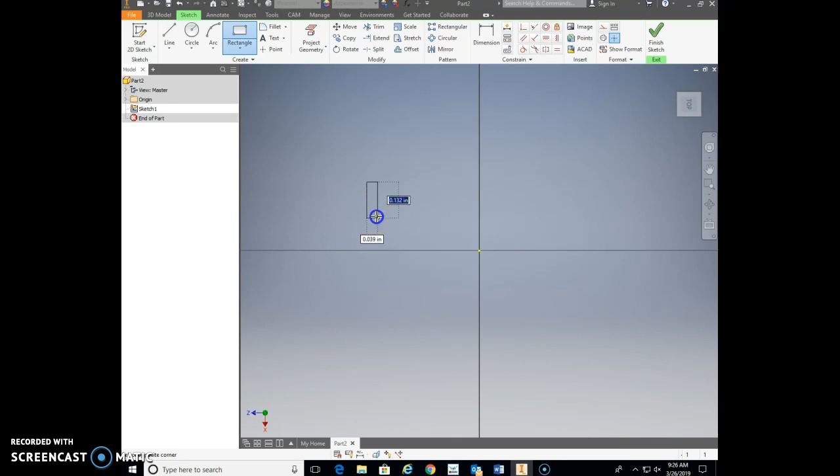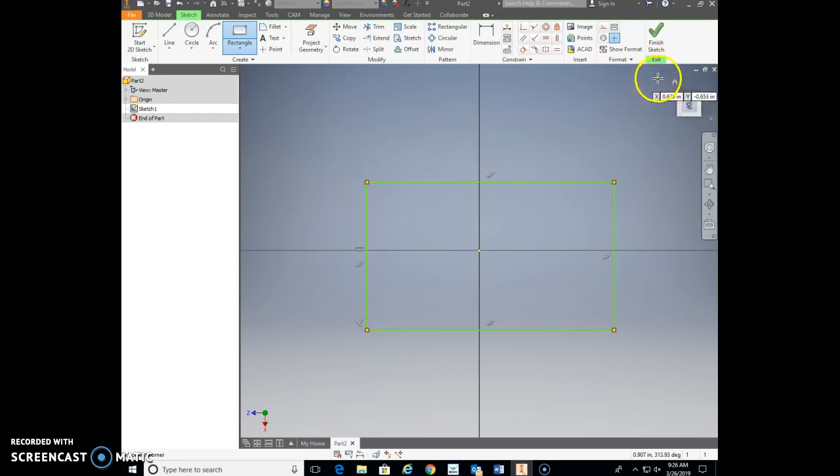The other thing I'm not going to do is take time on all these drawings to fully constrain them. I know that's horrible, but I think it'll make these drawings go a little faster. Obviously, you'd fully constrain that horizontally and vertically, dimension it, and finish that sketch. I'd extrude that base, and something like that base looks similar to the one in the book.

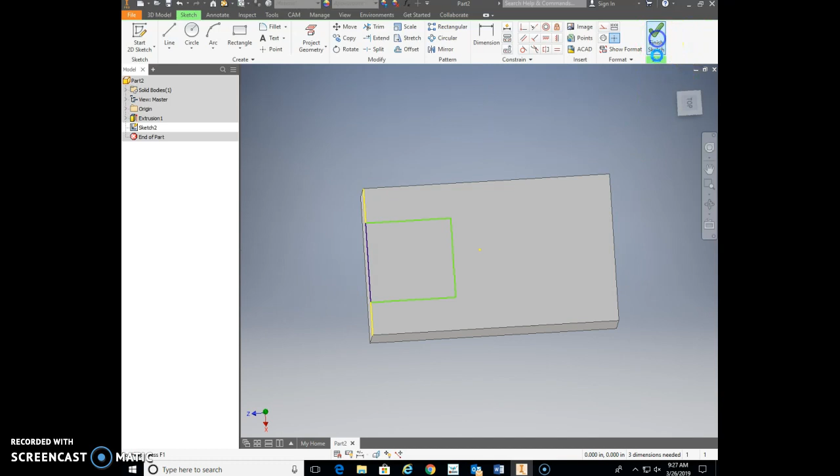Next, I do my next sketch on this top plane. I think that's what I'd do. I'd make a little rectangular shaped block attached there and around to there. Notice how that back line is blue. I'd obviously get that centered by dimensioning it, but I'm just going to eyeball mine here. Something kind of like that, and I'll finish that sketch. So there's my block. I'm going to extrude it with the scale I'm using now, something about like that.

All right, so I got that—that's the first part of the letter F. Next, I'm going to put this triangular shaped piece on there. I'll start a sketch on this top plane and draw a line using the line command.

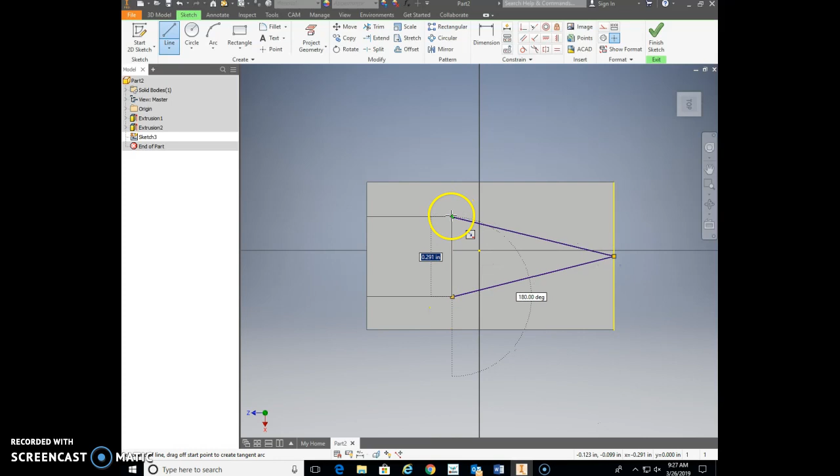I'm going to draw from that corner, it gives me a green dot, to the midpoint up there gives me a green dot, from there back to there gives me a green. Whoa, did not give me a green dot. Let me try that again. My goal here is to fully constrain it. There we go, and there to there. Now notice that's all blue already—that's fully constrained. So I'm going to finish my sketch.

I'm going to extrude this, and here, instead of putting a distance on this, I'm going to mix it up a little bit. Where it says distance, look at some of my other options—I'm going to go 'to,' and go to this surface right here. That way, no matter if I change this distance, this will change with it. I'll go OK there. So right there, that's looking pretty good.

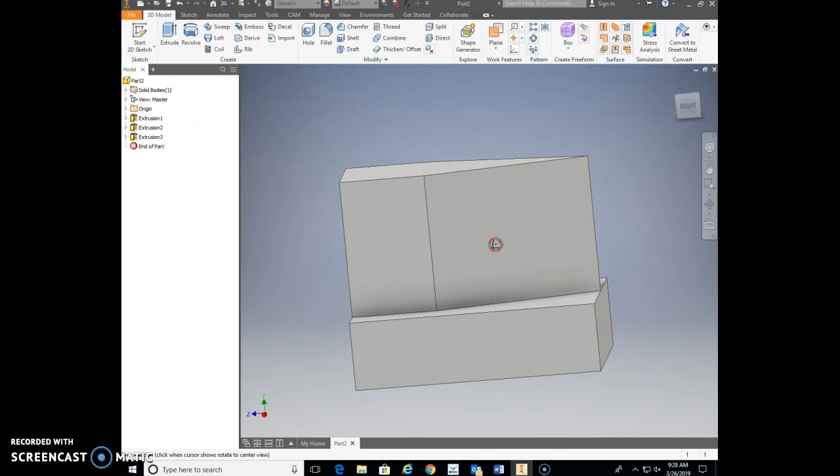But however, I do not have this part angled down here, so I'm going to start another sketch. This sketch, when you start it, is kind of important. You don't want to start it here on this plane, because this plane angles, so then your sketch plane would angle. You want to start it here on this flat portion.

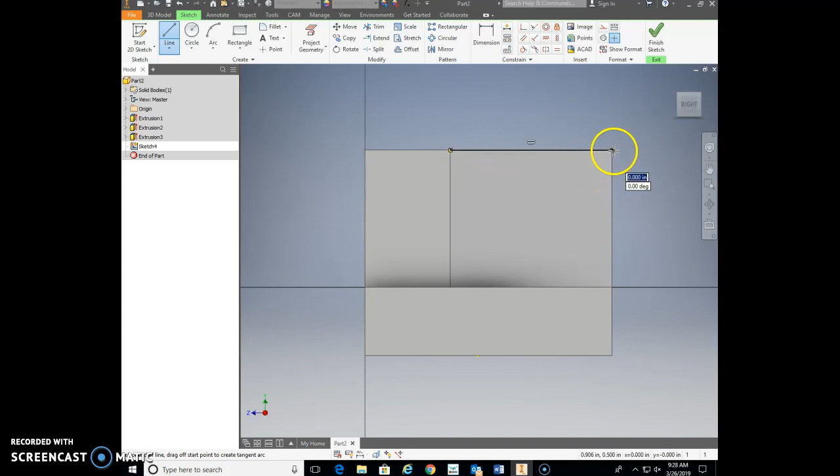So you start your sketch there. Once again, I'm going to draw a triangle shape. I'll start it right there on that green dot, straight over, lock into that green dot. Here, I'm going to draw it down a ways to there, and something like that. Again, you would dimension that to constrain it and turn it all blue, but I'm going to go ahead and finish the sketch.

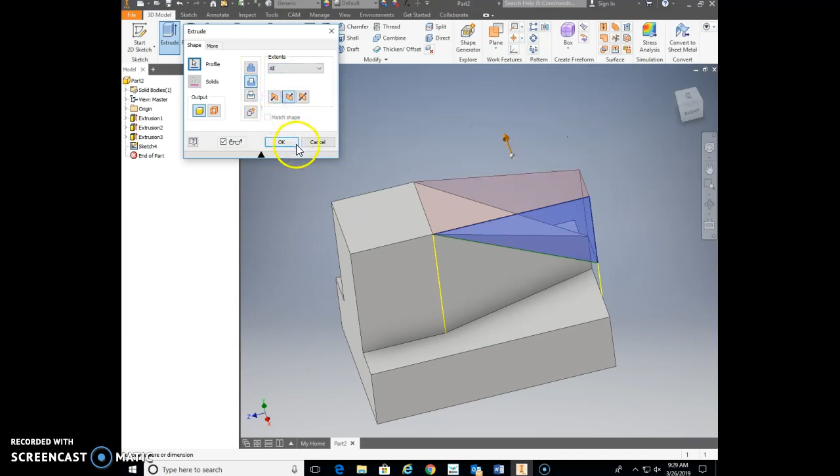I'm going to extrude that shape, making a cut. Once again, instead of setting a distance, I'm going to cut it to all. I'll go all there, go OK, and there is that block finished up beautifully for letter F.

Obviously, it's not the exact same dimensions as the one in the book or same proportions, but it's close, and I would have taken more time to do that, but I wanted to hurry through this. All right, there's number one.

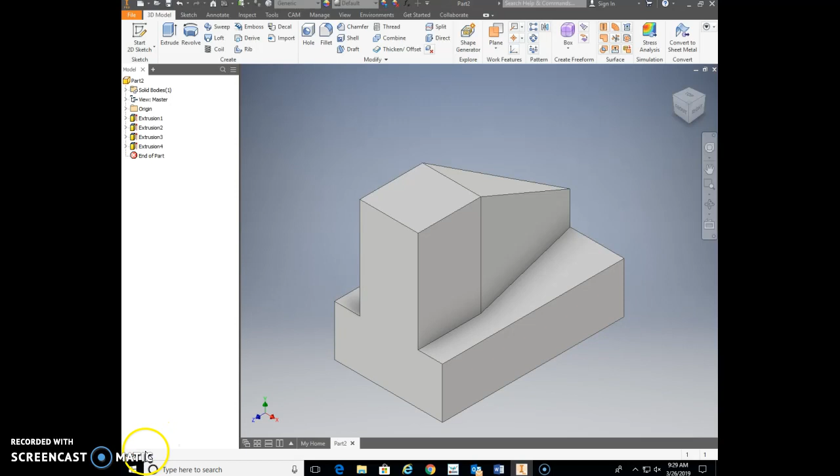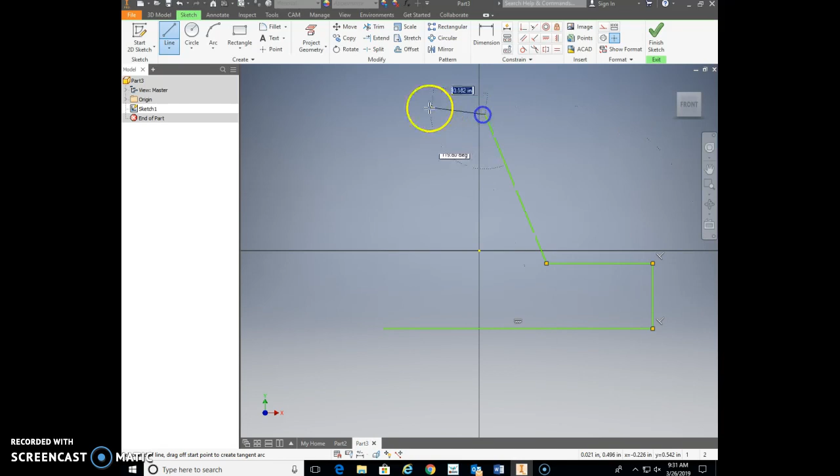Now I'm going to go on and do bottom letter H, so I'm going to start my sketch on this front plane. In that front plane, I'm going to use my line command, and around my origin, I'm going to draw the shape that you see in that front view, so something that looks similar to that.

Once again, I'm not going to take time to fully constrain this. I'm going to go finish my sketch. I'm going to extrude, let's go something about like that, and that looks pretty good.

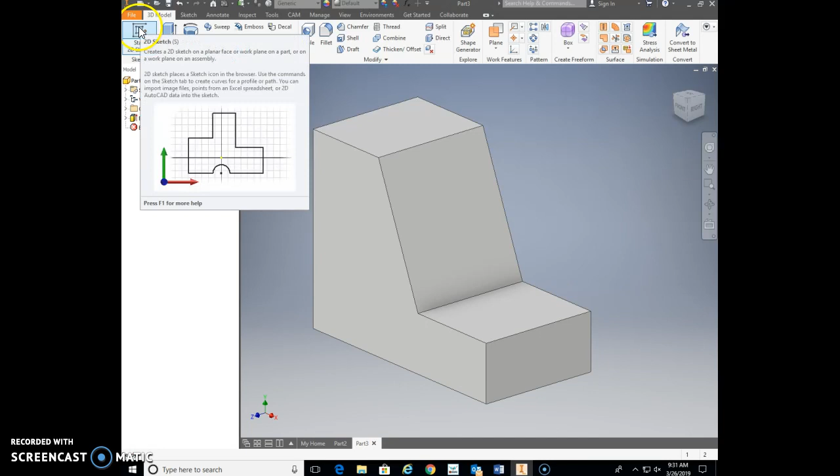So there's that shape. From there, I'm going to go ahead and start another sketch. This time I'm going to start it on this end plane here, or I should say end on this right side plane.

Here we're just going to draw a line. Notice how it gives me a green dot there. I'm going to come up to the midpoint of this line, it gives me a green dot there. I'm going to come from there down to there. Whoops, did not give me a green dot, so I want to redraw that line, or I can drag this line like this.

Notice here, it's not giving me the green dot. It's being stubborn, I don't know why. Sometimes Inventor will do that, gives me the green dot here, it doesn't here.

What you can do is something called project geometry, and this is a good one to see. So project geometry, project the geometry of this surface, and it highlighted it there with blue.

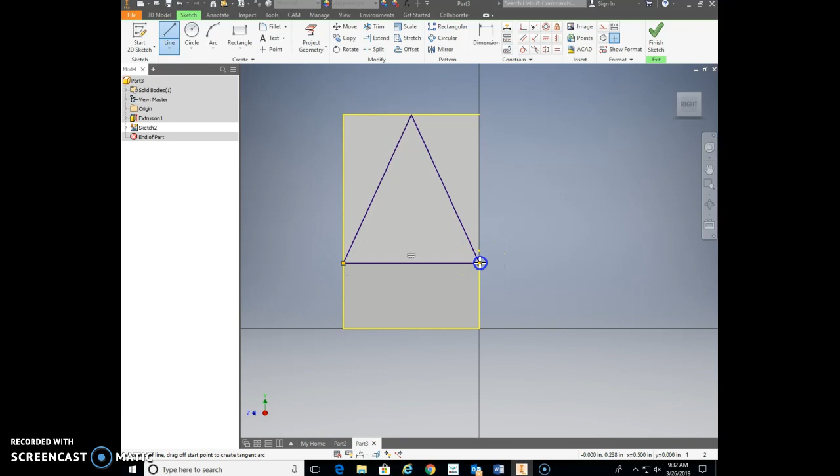Now you can grab that. Notice, you can lock into that dot. Oh, it's good. Now we're going to draw this one across from there to there. That is all full blue. Now we're just going to finish our sketch.

I'm going to go ahead and go extrude. Select that shape to extrude. We're going to make it go the other direction. Now here's another instance of, instead of putting a distance in there so where it overlaps, just come up here.

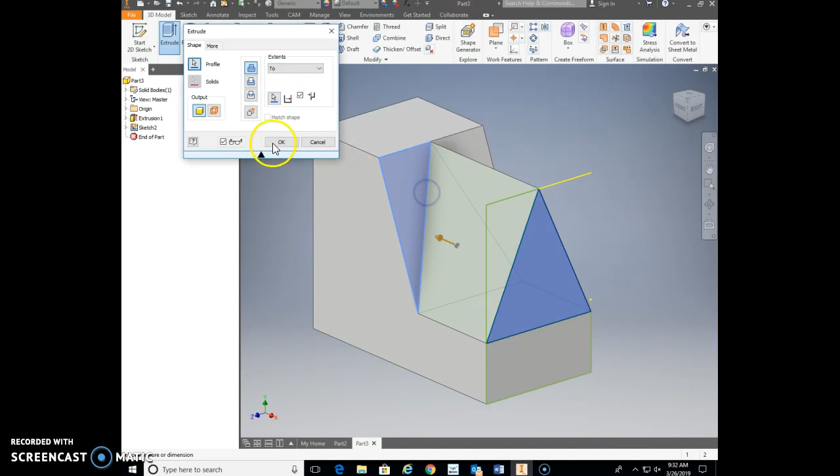What one do you think you might pick? The same one we did the last time, which is To. We're going to go to that surface right there and go OK. There, that one's finished up already.

Again, we didn't do this on the last one, but pick some material. Gold, beautiful. Save that as page 81, bottom H, and you'll be great.

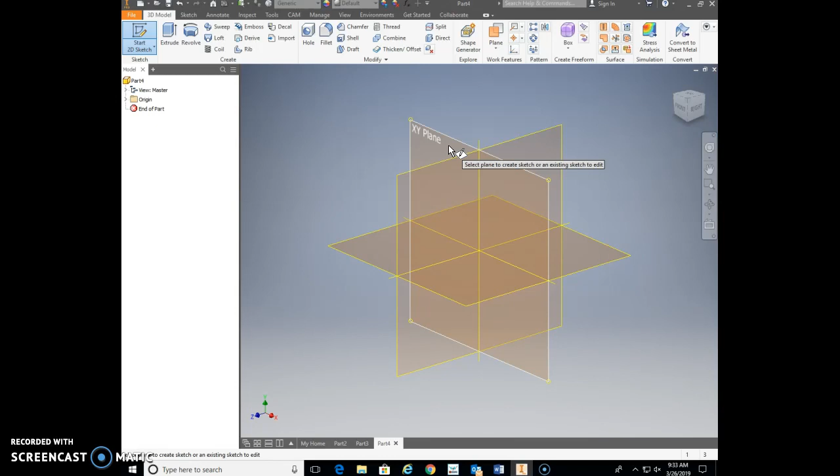All right, J. This is J. Eeny, meeny, miny, mo, how I'd start J. If I started on the front plane, I'd draw that little kind of upside down U-shaped block. Or if I started from the right side plane, I'd draw that angled piece. Like I say, eeny, meeny, miny, mo. I'm going to start it from the right side plane, I guess, there.

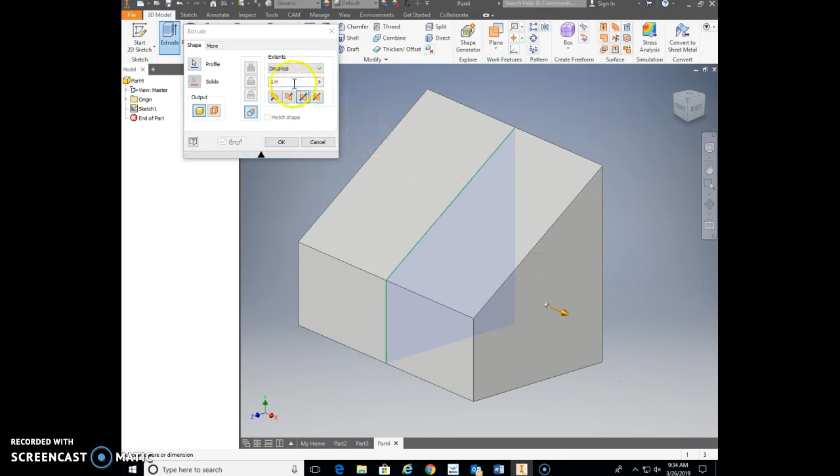From there, I'm going to draw this shape. Again, I'm not going to take time to constrain that. I'm going to go finish your sketch. Going to extrude both ways, and to make it proportional, I should make it a little bit wider this way. I think that's pretty close to being proportional.

Then I'm going to start a sketch here on this front plane. Easy enough there on the front plane, I'm just going to draw a rectangle. Going to draw my rectangle there. You'd get that all centered up and fully constrained, I'll let you figure out how to do that. I'm going to go ahead and finish my sketch.

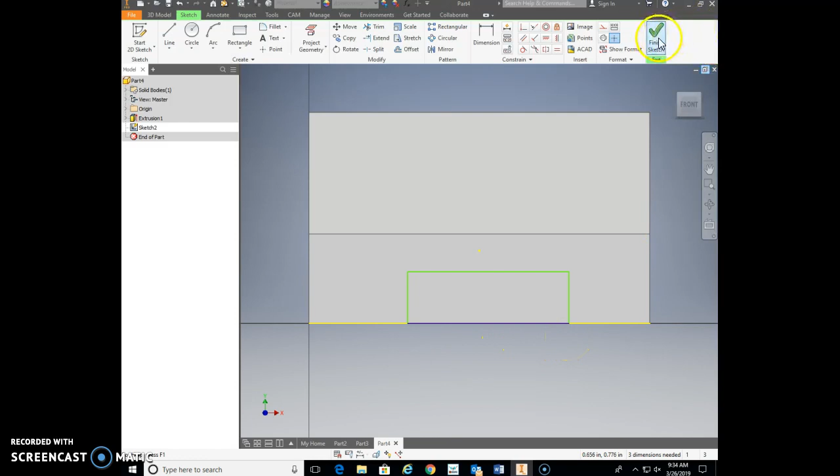Maybe I'll make it a little bit better before I do that. That's a little bit closer. Finish my sketch, extrude. Now this one I'm going to change to cut.

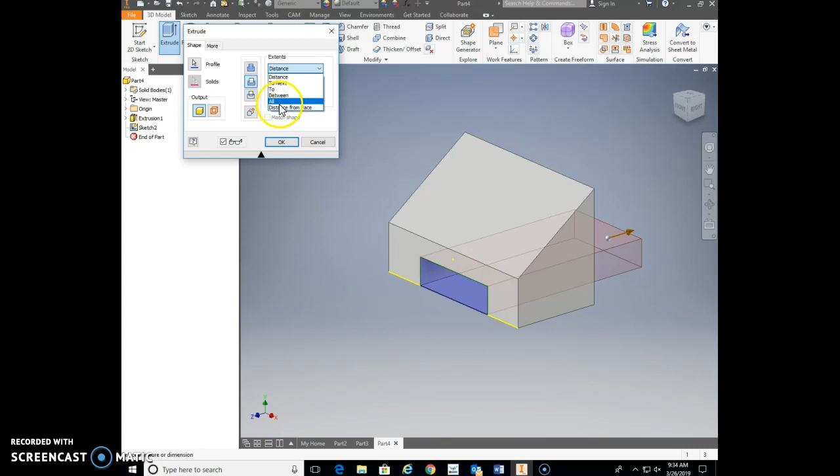Again, very similar to what we've been doing on these last couple. Instead of cutting it a specific distance, I'm going to cut it. I'm going to cut all of it. We could go To, but in this instance, it'd just be better to go all. So I'm going to cut all of it, no matter what. I want everything cut. I'm going to go all and go OK.

Okay, so now on this one.

This one we need to make a sketch out here in the middle of this block on a plane, and I'll open up my origin on that plane. But there's a little bit of a weird thing here, so this is going to be kind of an advanced step. If you figure this one out on your own, kudos to you.

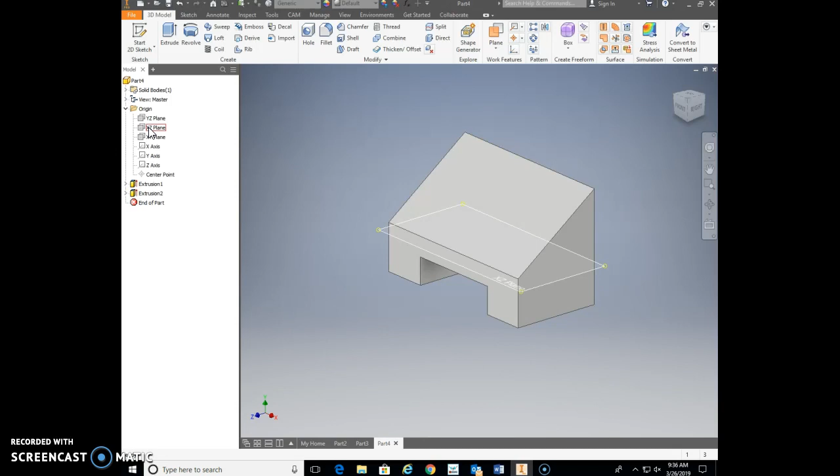If you didn't, here's how you do this. Notice this plane only shows up when I hover over it. What you need to do is turn that plane on so you can see it. If I right click on that plane, there's an option called visibility. Put a check mark by the visibility, and notice that makes that plane visible now.

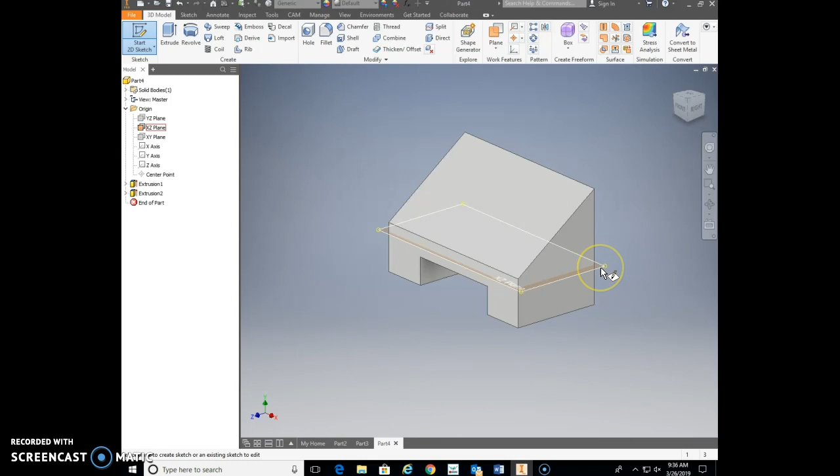Now what I need to do is make this plane not right here, but sketch on a plane that goes through this corner. So I'm going to go Start Sketch and come up here. I'm going to hover over top of this plane where it's highlighted, click and hold, and now notice I can drag this plane up and down. I'm going to drag this plane up just a little bit, and then put that plane in exactly right there to that corner.

Now, for me, that's going to be difficult because I didn't make mine as any normal increment. Normally it'd be up 1/8 of an inch or up 1/4 of an inch, some nice even number. Mine is not going to be a nice even number, so I'm just going to have to guess. I'm going to go about 0.1. That got me pretty darn close to that corner, and that's going to be good enough.

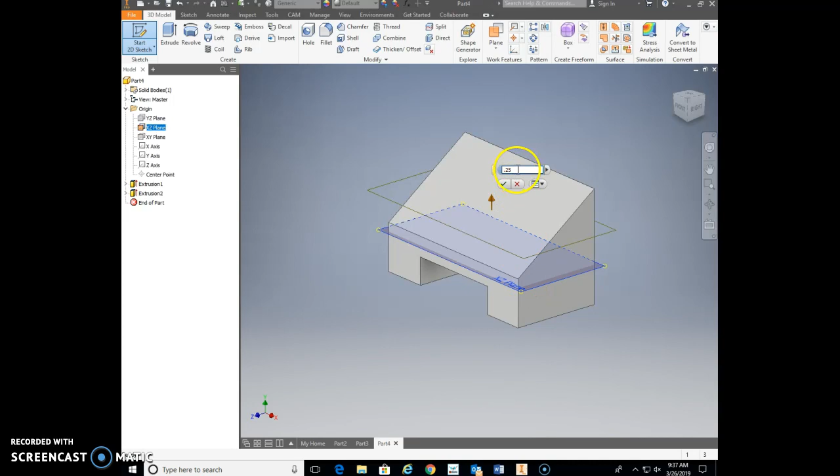Notice it moves as you type this in. Yours should be, if you keep everything on a 1/4 inch increment, 1/4 inch or 1/8 of an inch or 3/8 of an inch or 1/2 of an inch or something like that. I just accidentally did that there, and got it way up high.

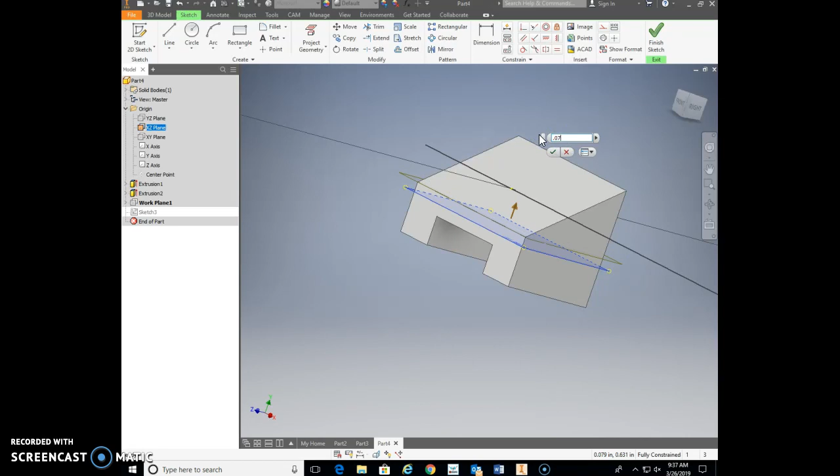What you can do there is edit this work plane. So I'm going to double click on it, and there's where my 1/4 inch was. I'm going to go back down to 0.1. And, oh wow, looking at it, 0.1 is not really where I want that to be. I'm going to go a little bit lower, 0.07. Ooh, 0.07 is beautiful. All right, so that worked for me.

I'm going to go ahead and put that back in normal view. All right, so now the rest of this is easy. We're going to hit F7 so I can slice my graphics, and I'm going to draw in this little triangle shape here that I'm going to cut out of this. So I'm going to draw a line. I want that line going to the midpoint there, locking in, up to this front surface of it.

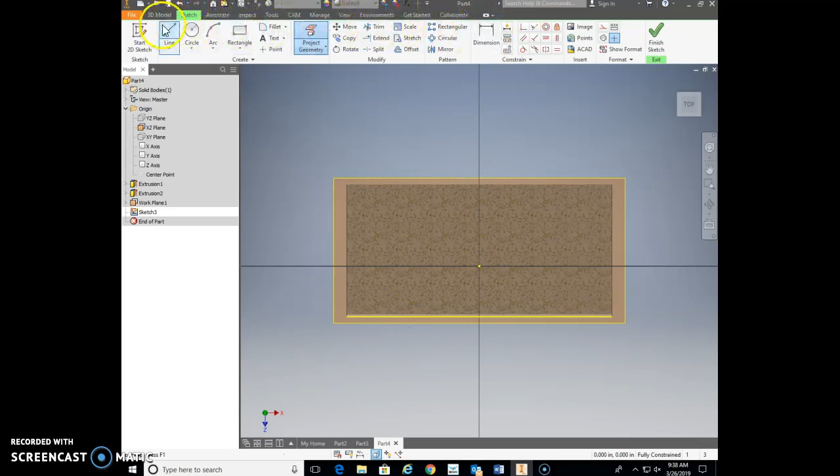Now in this instance, again, I'm going to have to project my geometry, so I'm going to project geometry of that front line. I'm going to try that again, going from that midpoint to that front line right there, and a line across there. Again, that line's all blue. That's nice. This will be locked into place, and here we can now dimension this in.

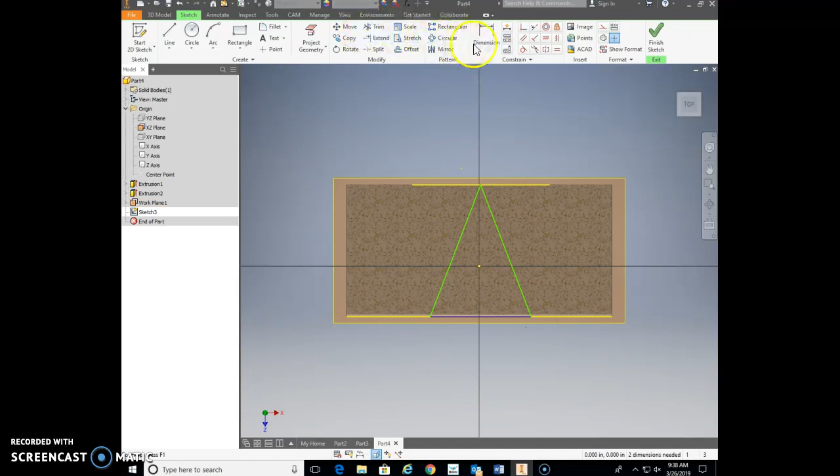And this is one I didn't show you - I probably should show you this dimension. We can do angular dimensions just by clicking on that line and then clicking on this one. And I can set that - looks like maybe a 45-degree angle is going to be appropriate. So that's got that nice there. The only thing is now it's 45 degrees, but it's not centered up.

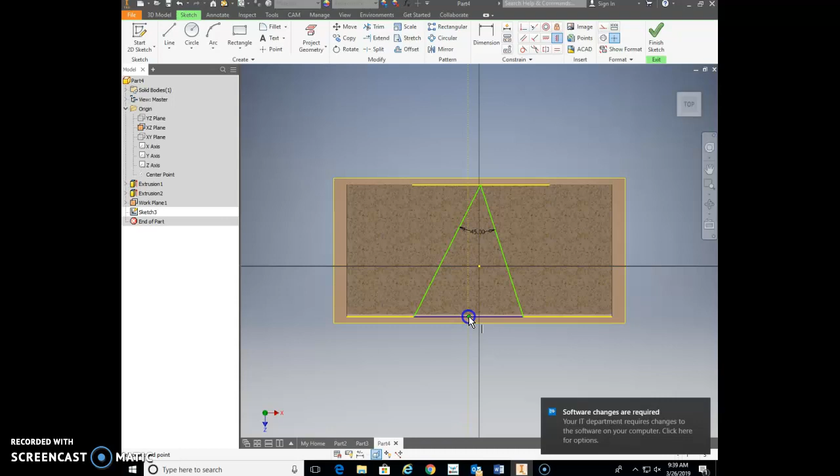What you'd have to do next is center up this bottom line. So do a horizontal or vertical constraint on that bottom line. Looks like it's going to be a vertical constraint there to there. And that one's got that fully constrained now.

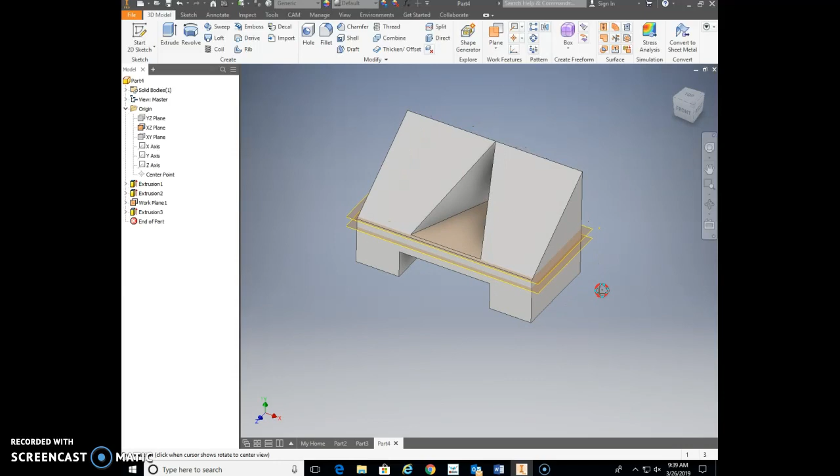Finish your sketch. We're going to extrude that, change it to cut, not a distance. Going to change the direction, back it up, and we're going to cut all. And there you go - is that thing beautiful? Looking just like that. Now here's the next little tiny tidbit on this: you change this to some material again.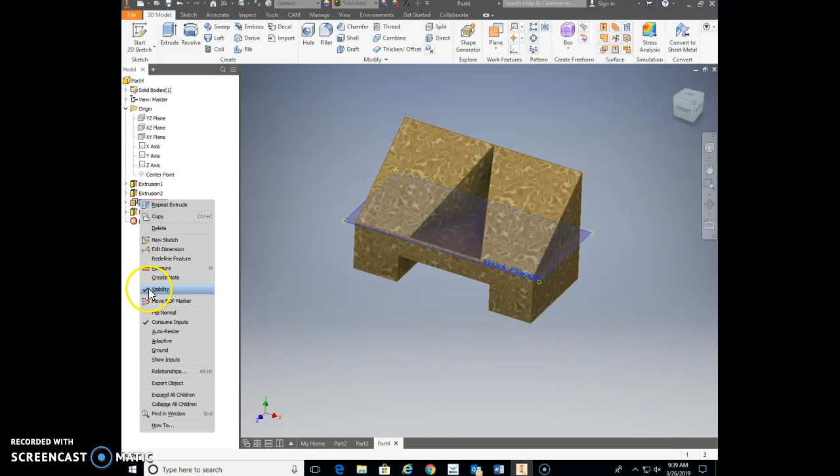Foil gold, sure. But I see these planes out here. I want to turn the visibility back off on those planes. So to do that, I'm going to come up here, right click, uncheck the visibility there, come here, this work plane's showing up too, uncheck that visibility, and right there is that looking beautiful.

So that's that one. Alright, next I'm going to do letter K. On letter K, I'd start that on the right side view. On the right side view, I would draw this shape. And let me see, why am I not blocking it? There we go, I'm going to draw this shape here, something kind of like this.

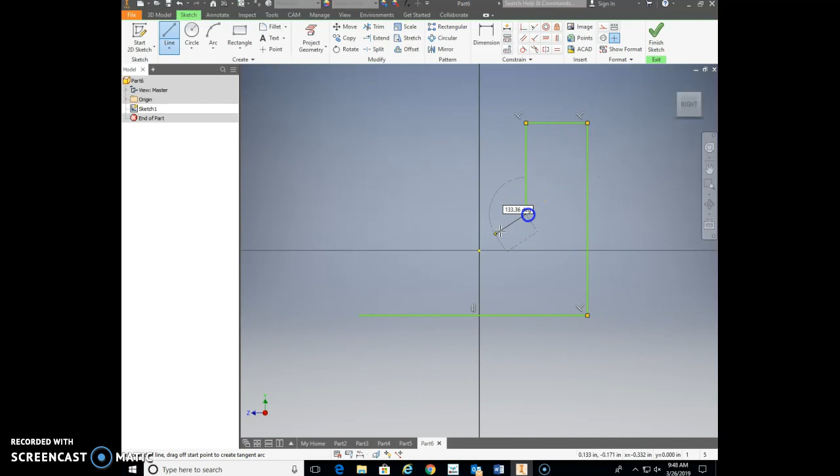And just draw that shape. Obviously, can fully constrain that, but I'm going to finish my sketch. Extrude both ways, and maybe a little bit more, something like that. So there's that. Then I do another sketch here.

I do the sketch on this plane here. I draw a little triangle shape in here. Let's see if it doesn't go quite all the way down here to the bottom. To there. A line across the top.

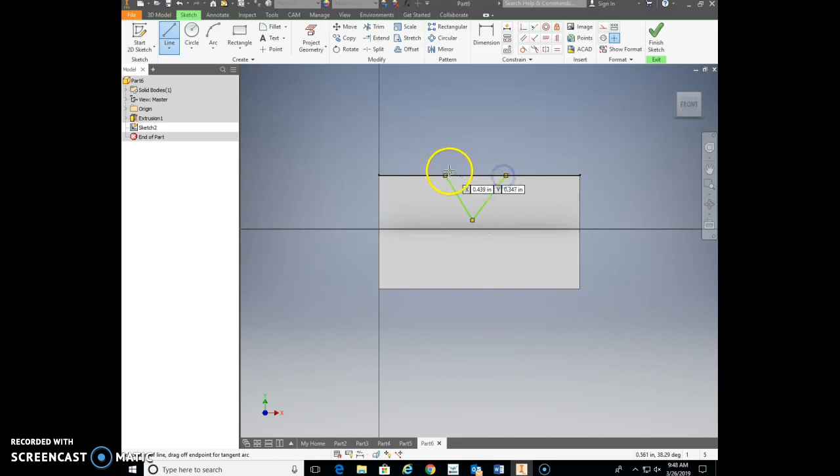Again, I would center that up. I would probably angular constrain that, but I would finish that sketch. Extrude. Cut it and cut all. Cutting all is a good option there because you always want that cutting all the way through.

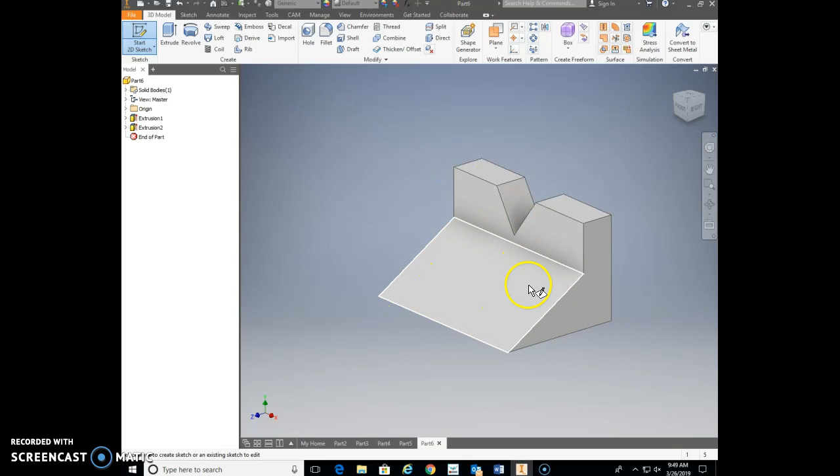Next, I start another sketch. Now here it's a little bit different. You wouldn't want to start your sketch on this plane. It actually started up here on this plane, which is a little bit weird.

You could also flip it up and do it on this bottom plane. You know what? I actually think I'm going to do it on this bottom plane there. So there, we're going to go ahead and draw our triangle shape here. Now there, notice one thing I did.

I didn't even do it on purpose. I locked it into that line. So now that's locked there. I really didn't want it locked there. It locked all the way back, so I'm going to delete out that line, maybe.

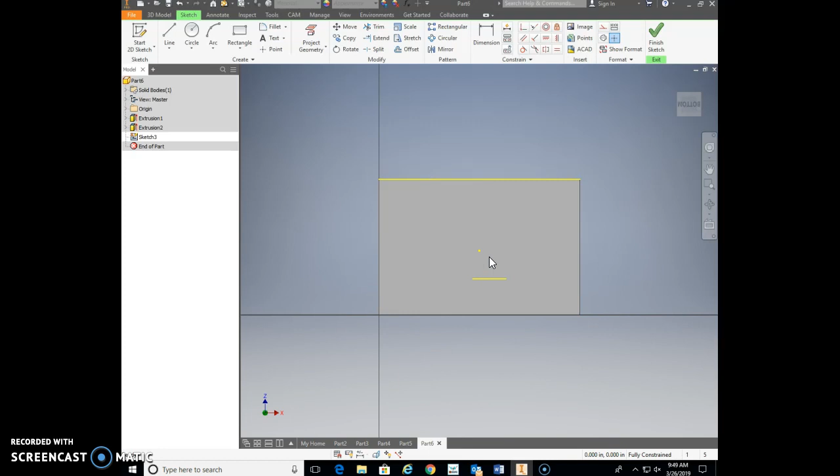I can select it. There we go. And I want it to start on this line, yes, but I don't want to lock it into there. So I'm going to go to maybe about there, to there, last line across the top.

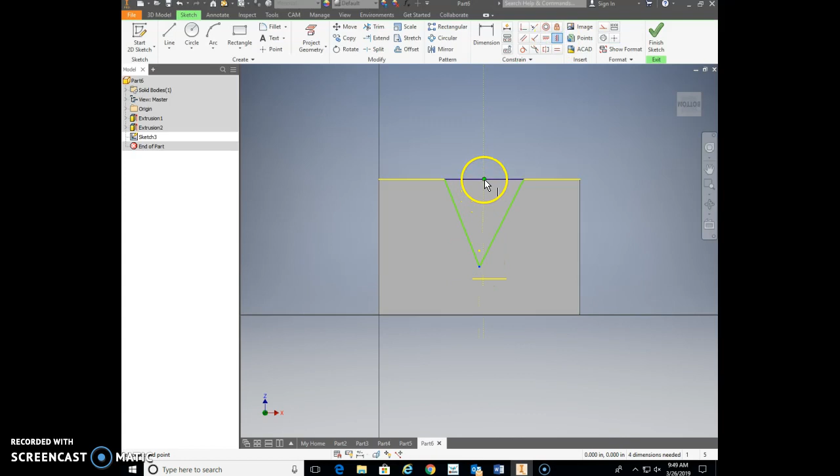Again, you get that all centered up. Probably do an angular constraint here. Maybe do a constraint here, a vertical constraint to your vertex, to the midpoint of that, which gets that centered up nicely.

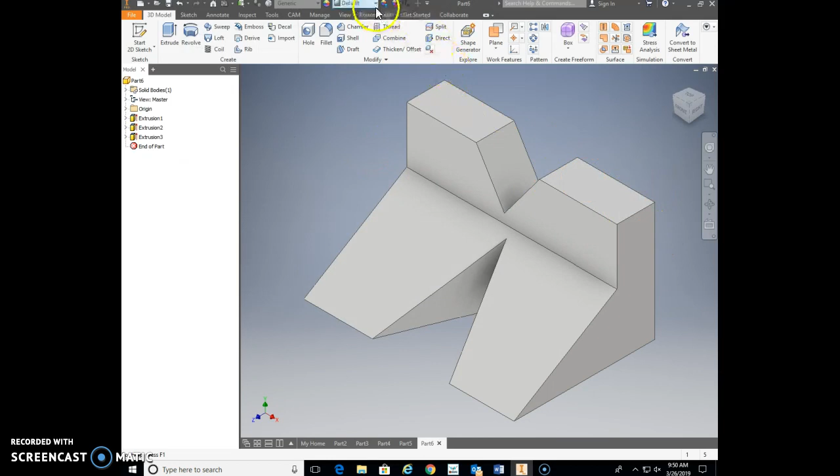And there, that's looking pretty good. But again, constrain the rest of that. Finish your sketch, extrude, again change to cut, and cut all. We're going to hit our F6, oops, cut all, okay. Hit our F6, and there that one is. Obviously not perfectly done without any constraints on there, but there it is.

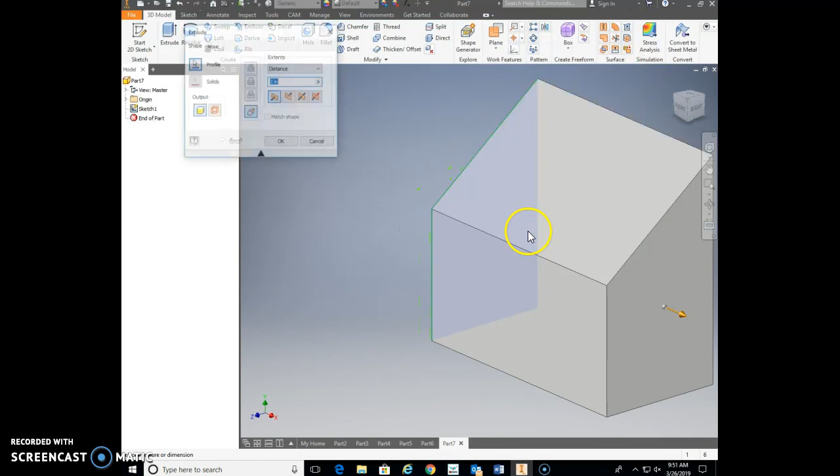Alright? Alright, we got a minute and 10 seconds here. Let's see if we can get through this next one. Letter O. I do it on this view. I come over here on the right side view, and I draw this shape there. I finish your sketch. I'd extrude it both ways, and let's make that a little bit more.

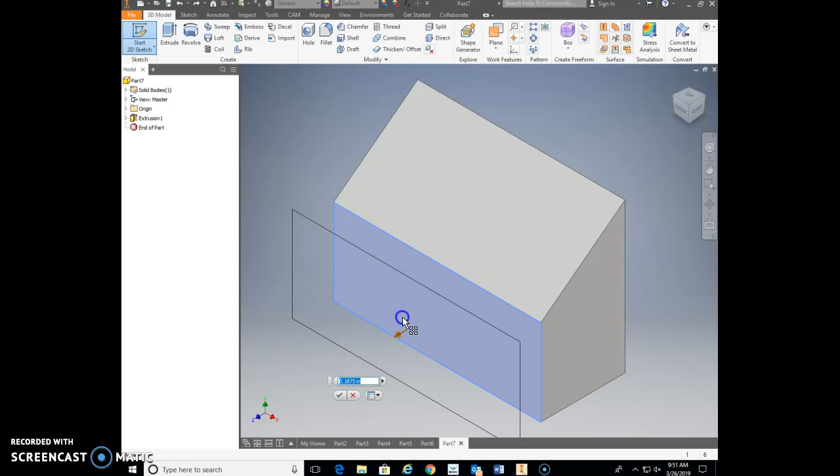Then I do on the front sketch, front plane, or this plane here. I do another sketch. Ooh, actually, gosh, I'm going to have to do that a little bit different. Here, we're going to have to do an offset plane. So I'm going to start sketch, click and hold on this one, and drag this out a little bit.

Set to that some nice number, 1/4 inch maybe, and just drag it out to there. Now I'm going to do a drawing here on this side. I'm going to draw it right from there. Let me look at my roof line where it goes. It goes right there. Does not go quite to the top. Something about like that.

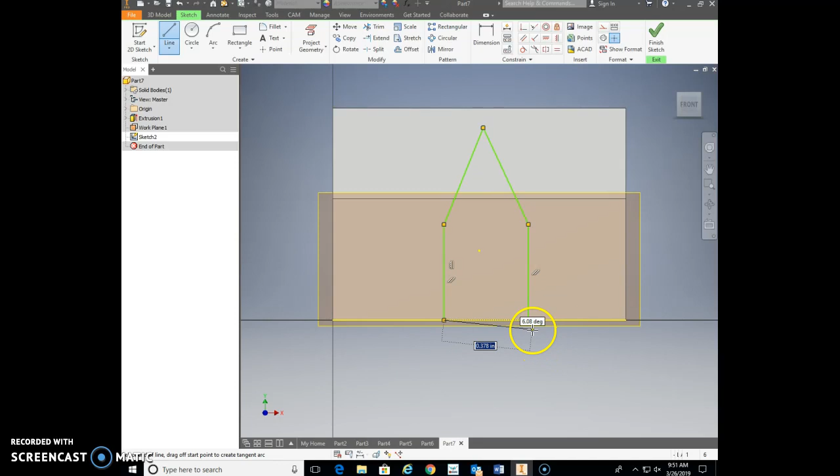There. Got that shape. Finish your sketch. I'd extrude the other way, and distance of 2 right there. And that's not it, I misclicked something.